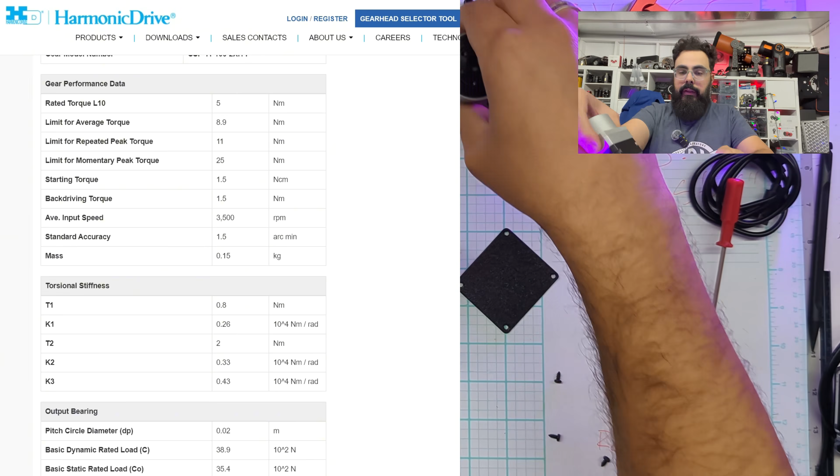I opened my harmonic mount and found that this DEC shell here, which is just 3D printed plastic, was doing work as a structural component, holding the DEC axis and the saddle and your telescope to the RA axis with 6 small bolts that were just being squeezed through this 3D printed shell.

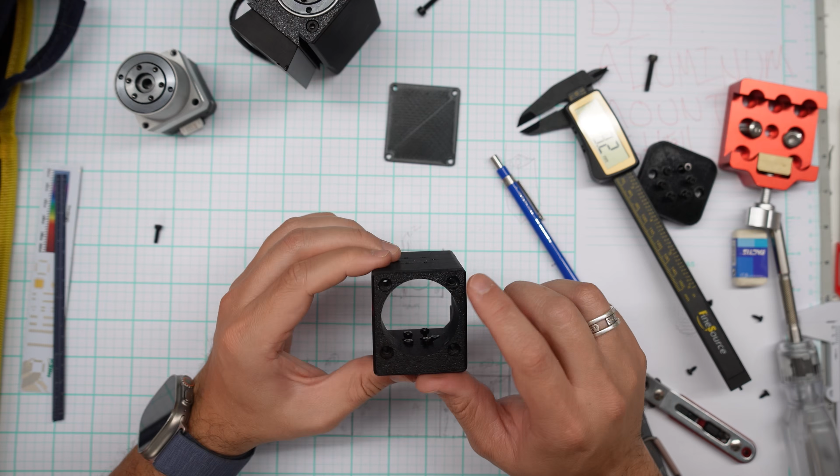So I'm doing something that I've never done on this channel before, and I haven't done in my personal life in a while. I'm going to use drafting in CAD to make a new part for this.

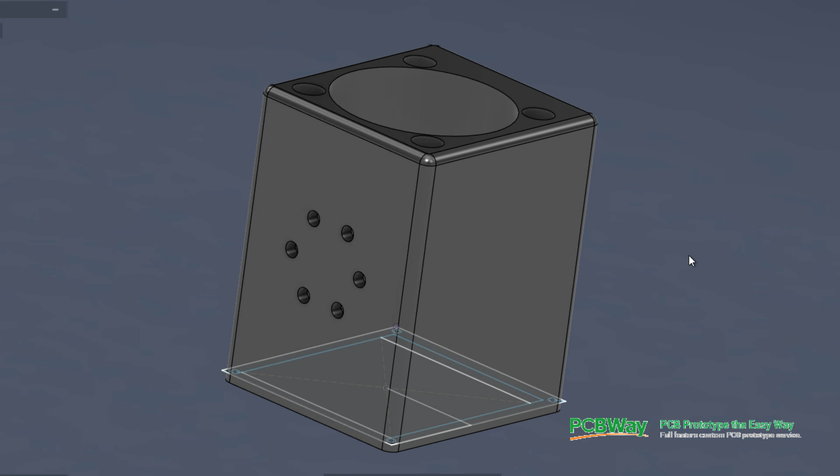But we're gonna start with an aluminum replacement shell for the TeSeek Mini 11. This is the kickoff of that series. There's no hype here. I'm gonna walk you through how I sort of got all the critical dimensions, how I made the file in CAD, and how I submitted the file through PCBWay's online portal so that I can get the first iteration of this in my hands and we can start testing it.

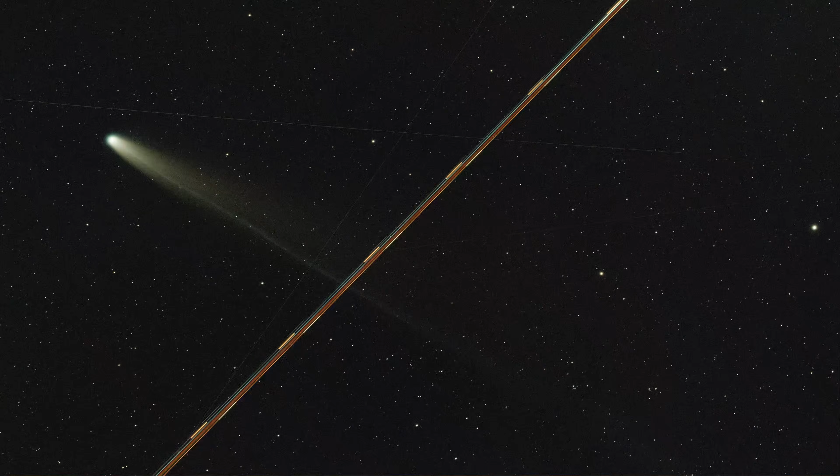If you watched the last video on the TeSeek Mini 11, you'll see I actually really like this mount. I just have been using it for a while now. I've taken it on a couple small adventures, and I really don't trust this DEC housing here, especially now that I've seen the insides and I know how this is all held together.

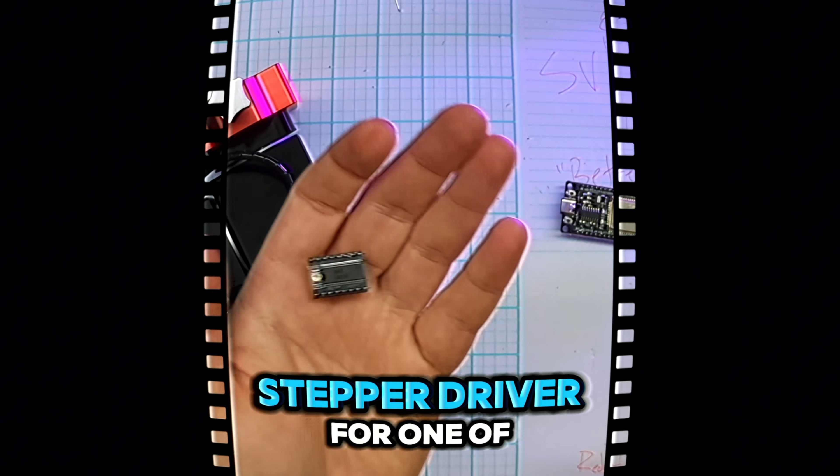Now, to be clear, the tracking on this is already pretty good, and I don't necessarily know. We'll test it to see if there'll be any improvement. But really, I just want to get rid of any of this flex that exists between the DEC housing and the RA. The rest of this housing here, the way it attaches to the wedge, is actually pretty good, and we may upgrade this in the future, but for now, I want to focus on what I feel is the weakest part.

To be clear, I'm basically redesigning the DEC shell and housing. So it's this half of the mount here that holds eventually the saddle and your telescope. Once I'm through the prototype iterations and I'm confident that this file works, I will make the file available so that other people like yourself can order it directly from PCBWay in metal if you want to.

And here's why I'm focusing on the DEC axis first. The RA motor and housing on this side actually seem pretty solid. It's a pretty decent sized chunk, and it's pretty tightly pressed in there. This feels like the grown-up part of the mount, excluding this sort of flimsy housing for the electronics. I have my own issues with that. But for right now, the DEC side is the thing that makes me nervous.

On this mount, the DEC housing is holding the entire scope through the 6 small bolts that you can see on the inside right here. These bolts hold this casing here to the rest of the mount. So that means that this DEC housing is not cosmetic. It is part of the integral structure of this mount.

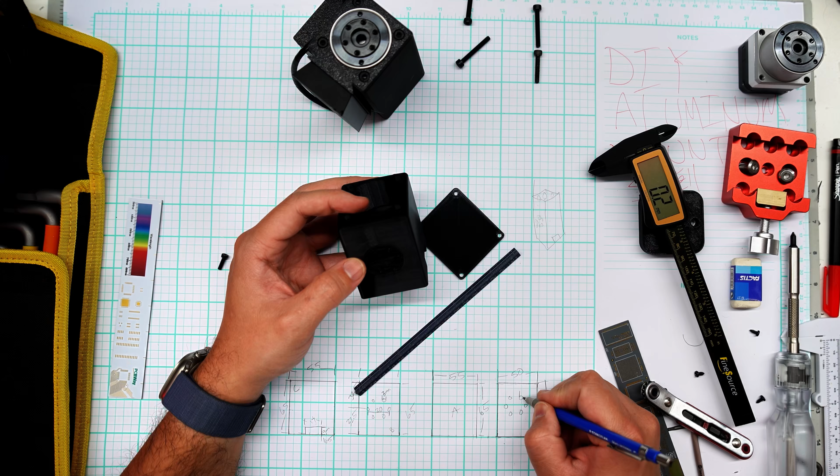And the other will be the CNC optimized file. So let's get into it. When I measure parts like this, I like to sketch everything on paper first. It sounds old school, but it helps a ton because I break the whole thing down into faces and it's easier for me to just erase and sketch on paper versus doing it in CAD CAM. This is how you can tell that I'm a little bit old.

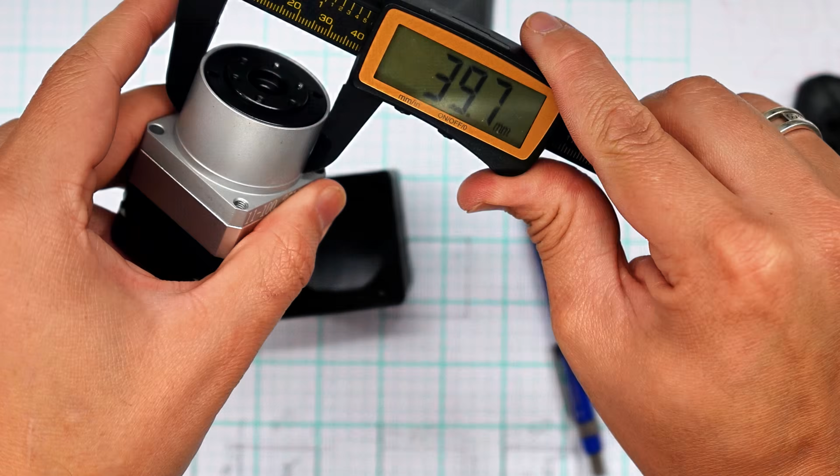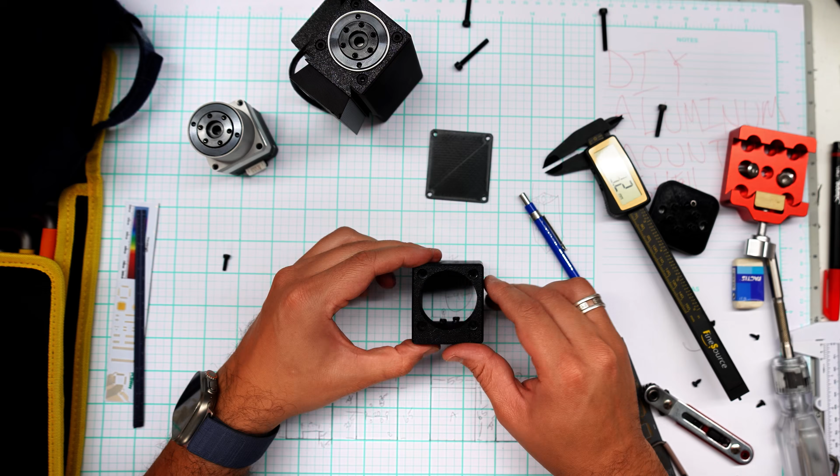I'm basically asking, what are the important flat surfaces? Where are the holes relative to those faces? What surfaces locate the motor and the bracket and the connection to the RA axis? Once the part is broken down by faces, the CAD process actually becomes easier because essentially CAD is you sketch a face, you extrude, you create a 3-dimensional part, you create a new sketch on that face that you just created, and you repeat.

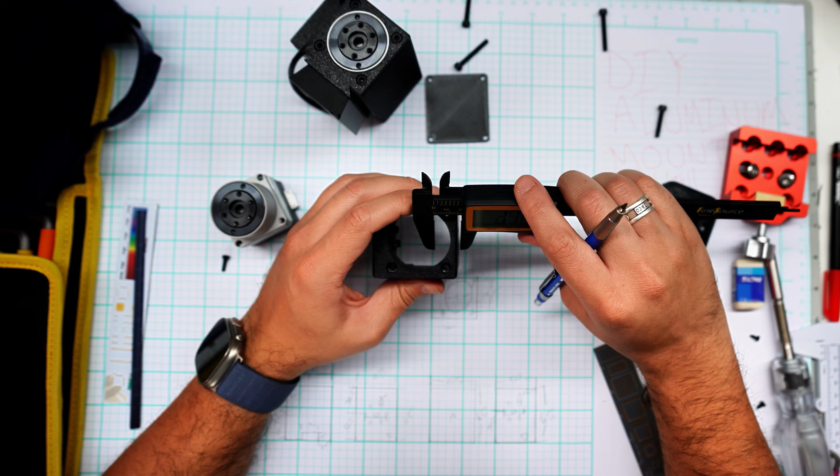And I'm not just measuring the obvious stuff. Bolt spacing is obviously important, but so are things like wall thickness, clearances around the motor, if there's any wiring concerns, and anything that might collide when you assemble it. Because if there's one thing I've learned from opening the mount, tiny clearances can turn into really big problems, as you remember from that video.

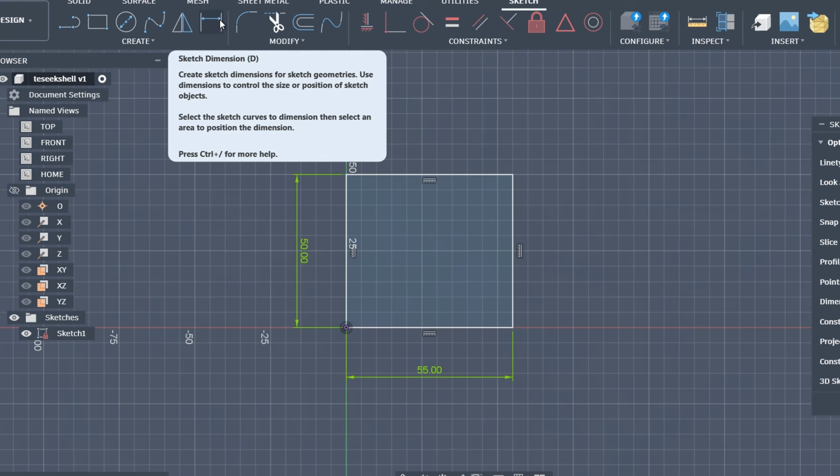For me, I had to install Autodesk Fusion. For personal, non-commercial use, Autodesk offers a free personal license with some limitations, but it is perfect for hobbyist projects like this. And I'm not going to pretend I'm some CAD wizard. I haven't used CAD in about a year, and even then it was for very small, very simple parts. So I did have to shake off the rust.

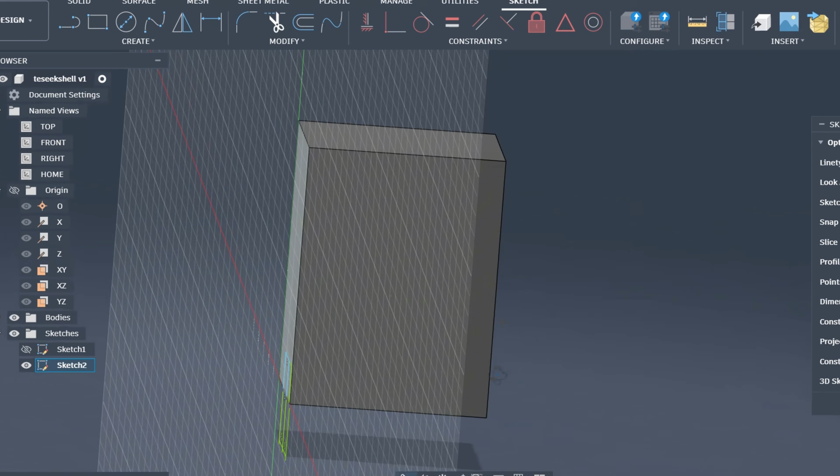Here's the good news, though. For parts like this, something like Fusion is pretty simple. There are a ton of different CAD softwares available that are free for hobbyist use, so find the one you're most comfortable with. For me, my workflow is start with the initial sketch to create the general shape, extrude that into a body, and then create new sketches on those new faces, cut holes, add bosses, add pockets, and then repeat until the part matches reality.

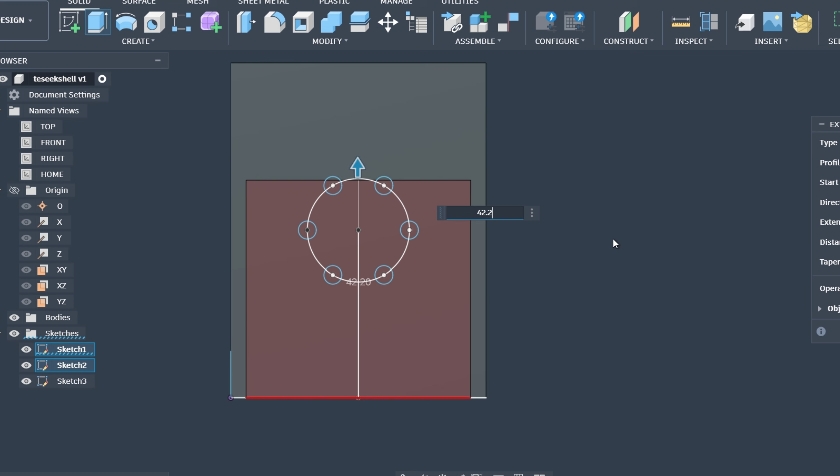This part isn't necessarily complicated, but what takes time is being careful and thinking like a manufacturer. Because I'm not just designing a part that looks right, I'm designing a part that can actually be CNC machined reliably. Now that's one of the advantages of the way this part was made before. It was 3D printed. So any internal complexity to the structure didn't matter because you were 3D printing it layer by layer anyway.

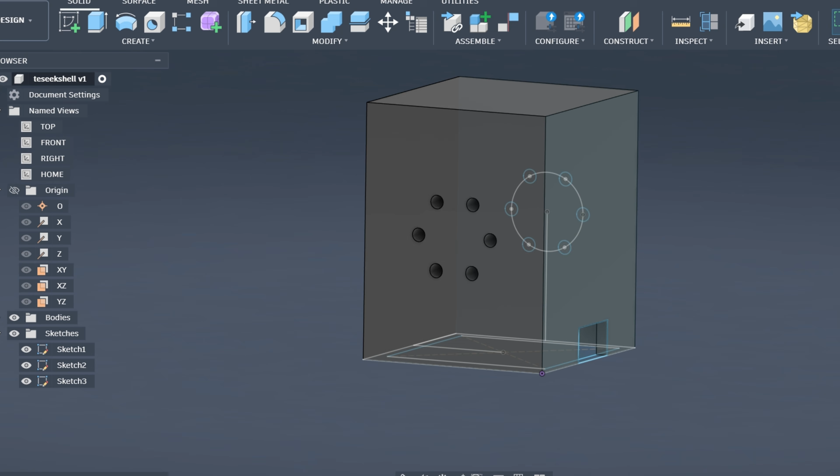But as we move over to CNC, we have to make changes specifically to make that manufacturing easier, like avoiding impossibly sharp internal corners, making fillets where a tool needs to fit, making sure that the features are reachable with standard tooling, and generally designing it so that PCBWay doesn't hate me for submitting this file for them to manufacture.

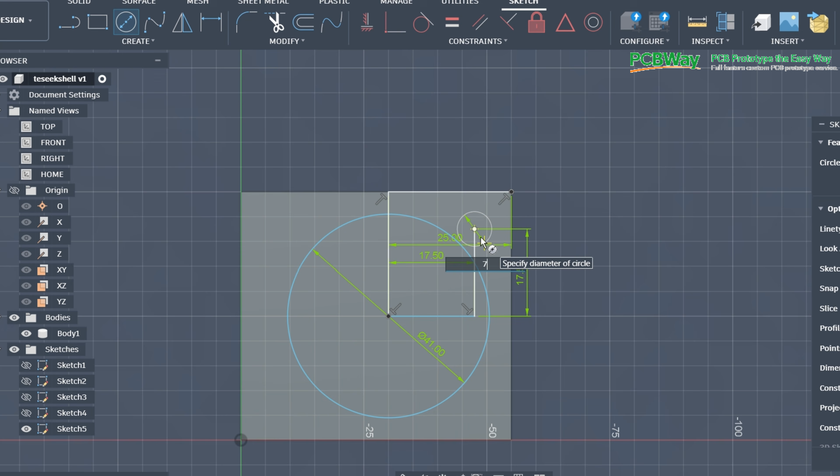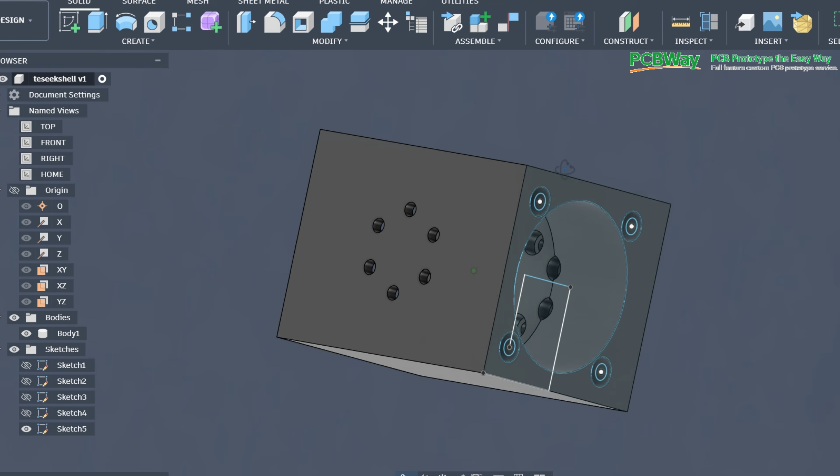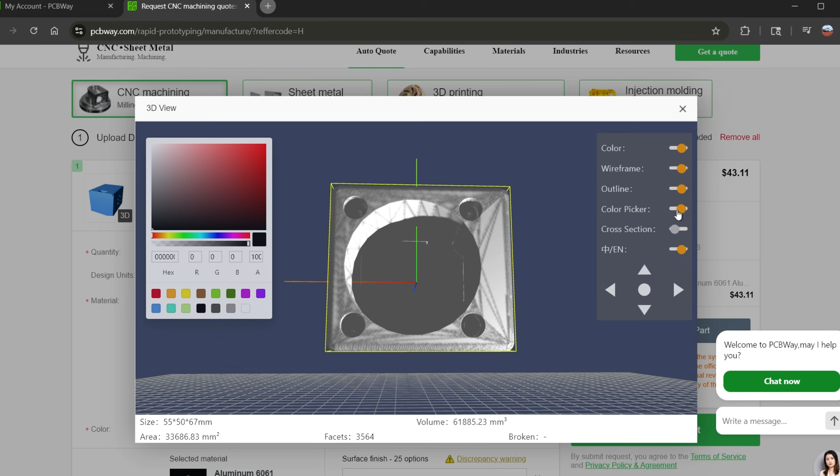So I submitted my redesigned DEC housing for prototype. And again, here's the mindset. Prototype 1 is not the final product. Prototype 1 is first contact of my idea with reality. I expect to learn things like, do my bolt holes align perfectly? Is there any interference with the motor or the wiring harness? Are my tolerances too tight or too loose? And does it clamp on to the axes the way that I expect it to?

And this is where iteration starts. And here's my test plan that I hope to do on camera and have you guys see every step of the way. So we'll start when I get the part in, which hopefully will be in about a week or so. Do all the parts that need to be in there bolt in cleanly with zero forcing? I don't want to force anything into this.

Do the threads align correctly the first time? So you've got those long bolts that go down from the top and they attach to the DEC motor. Does all of that line up correctly?

And then we'll do a clearance and motion test. Does anything rub or bind when we're trying to move everything? Does it clear any of the cables that need to be cleared? And does any part of it interact in a way that we weren't expecting?

Then we'll do a static load test. I want to assemble the mount as a fully dressed astrophotography rig, and then check for flex and shifting or weird creaking under load. I want to do that before and after the upgrade, as I'm pretty sure there is a measurable amount of flex between the DEC housing and the RA housing itself. And so I want to measure that once we get the new parts in, before and after.

Then we're going to do some slew tests. We're going to start slow. We're going to slew the mount around all of its normal positions that we would expect it to be able to do. We're going to confirm that there isn't some new collision zone that might not have been there before. And then we're going to do normal slews.

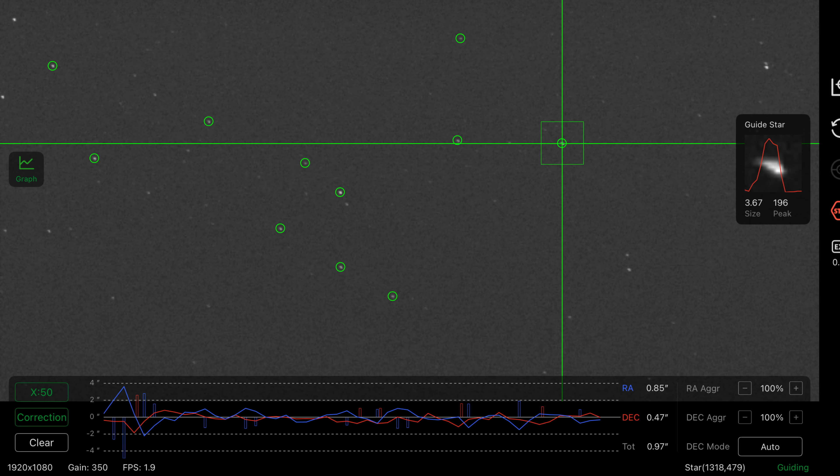And then I'm going to do a real sky test, which is probably the most important for me. We're going to do the same target, same workflow, same guide settings as for the 3D printed and the CNC part. And we're going to compare guiding behavior as well as overall feel during tracking. Sometimes the number may say that you've got X amount of arc seconds of error, but you can see sometimes in the pattern of the guiding corrections that weird things happen. And I want to see, is there any difference between the CNC metal part and the 3D printed part?

If it doesn't pass any of those stages, we don't pretend it's fine, we iterate. As long as it does as good as the 3D printed part in all of these arenas, then we can continue to move forward. Once the final design works and we've got a prototype that I feel passes all of our checks, I will make the file available to all of you to order it as well.

And I think there'll be two versions of this. There'll be the file version that is essentially a duplicate of the existing part, which means you might be able to manufacture your own 3D printed housings if you have a 3D printer. And then there'll be the CNC optimized file, which is what we're going to be working on in this series. I will make both sets of those available.

But I am going to try and do it responsibly. I want clear compatibility notes, any changes to any hardware that you need to buy. We might have to tap some holes. I want to make sure you know about all of that before you get into this crazy process.

Also, if you have any ideas for improvement on this part itself, please let me know. I'm thinking things like, should we be adding internal ribbing to make the part even stiffer? Where do you think all the stress concentrates on a part like this? Or should we try and make a maker-friendly upgrade kit where maybe we do this, we do the DEC housing, we do the electronics control box as well in the future? What do you guys want to see us work on?